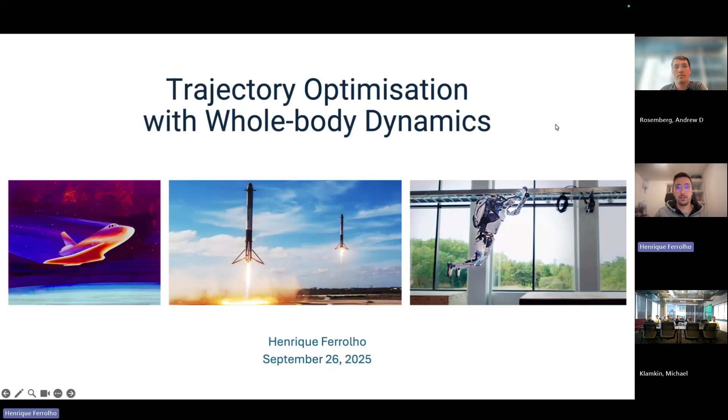But before that, I think I will give a bit of an introduction and speak a bit about me, so you guys get to know more about my background before we dive into the technical details.

I started doing robotics in about 2016. I'm originally from Portugal, but I went on an exchange program to Edinburgh, the University of Edinburgh, for my master's. I spent some time there, and then I applied and managed to get an offer to do the PhD there. So that's where I stayed from 2017 to 2021.

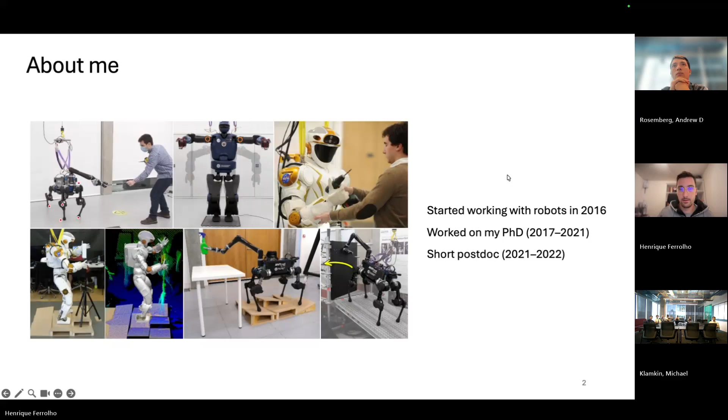After my time in academia, I switched to industry, and I worked for around 2.5 years at a company called Ocado. I'm not sure if you guys have heard about them, but they have big contracts with big supermarket chains like Sobeys or Kroger's in the US and Canada.

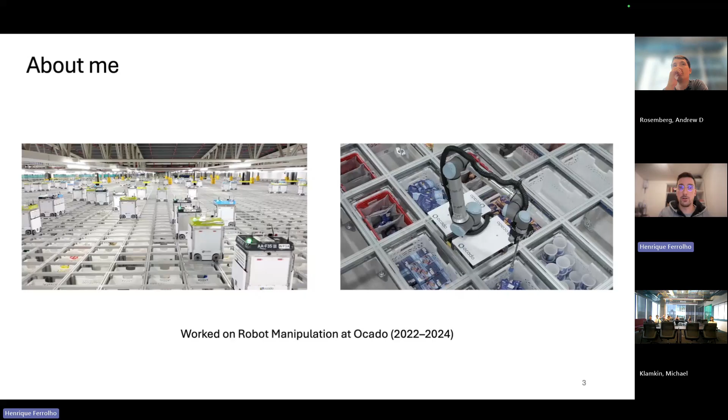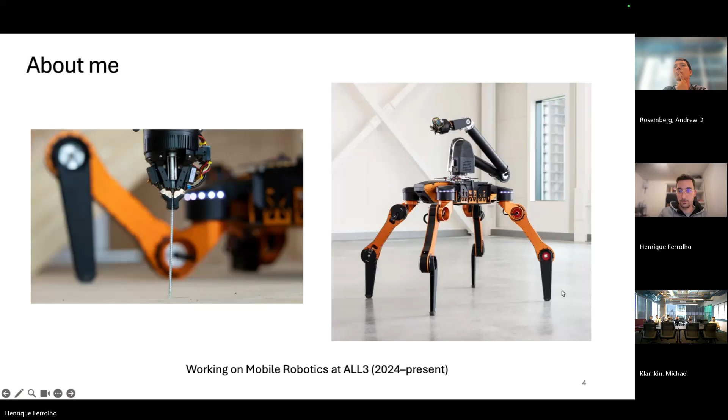That pretty much covers the work I've done in robotics on a professional level, but I really like robotics, and I have a few small projects that I spend some of my free time on.

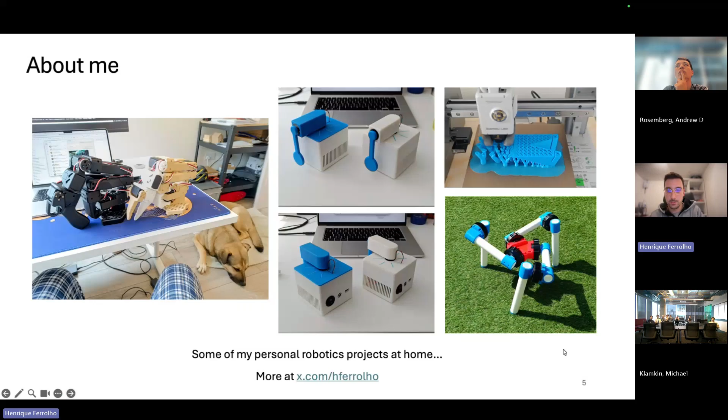Moving on to the actual presentation, so that concludes a bit the introduction about myself.

I will show you this video, from very close to the end of my PhD, and I'm quite proud of the whole sequence because there's no cuts in this video. I'll let the video play and speak a bit over it. So it's the ANYmal quadruped with the arm.

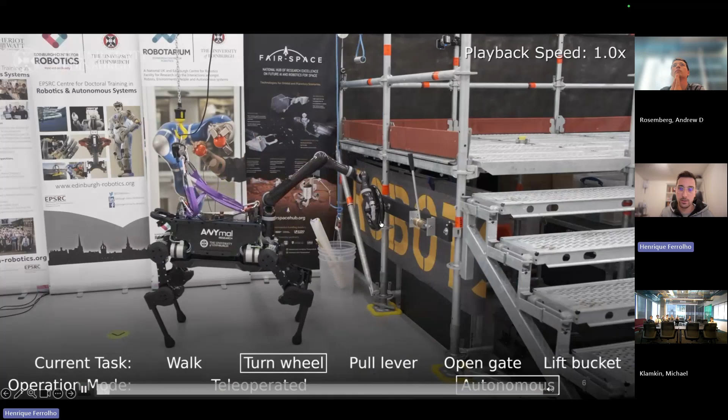We start close to an object that we are interested in manipulating. In this case, it's a valve. I'll try to get my mouse off of the video so you can see the annotations below.

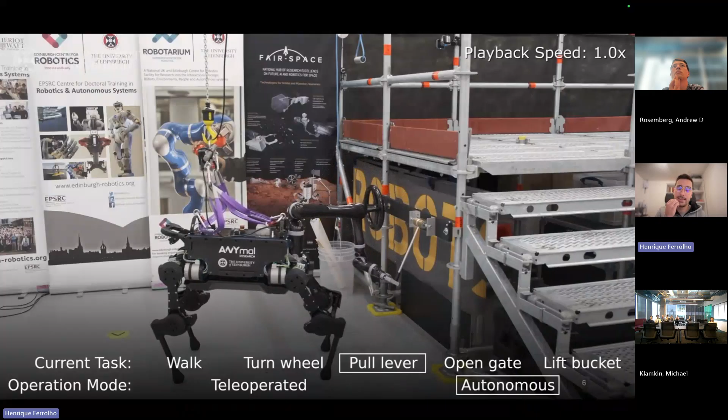You can see the operation mode is switching between teleoperated and autonomous. When I'm teleoperating, I'm only teleoperating it for walking with a joystick. I joystick it around, teleoperate it to walk close to an object of interest, then I switch it to autonomous mode.

It's not completely autonomous because it still requires someone to tell it what it should do. In this case, when I was in front of the lever, I had to literally press the button to say, okay, pull the lever.

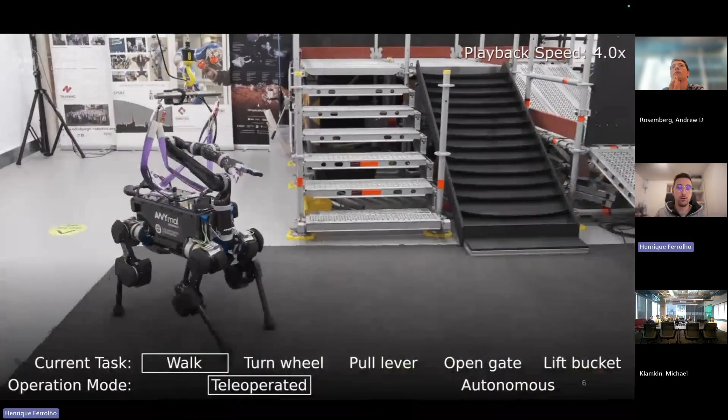You can see here when I'm walking around the lab environment and now up the ramp, it's still using the walking controller that ANYbotics provides when you buy these robots.

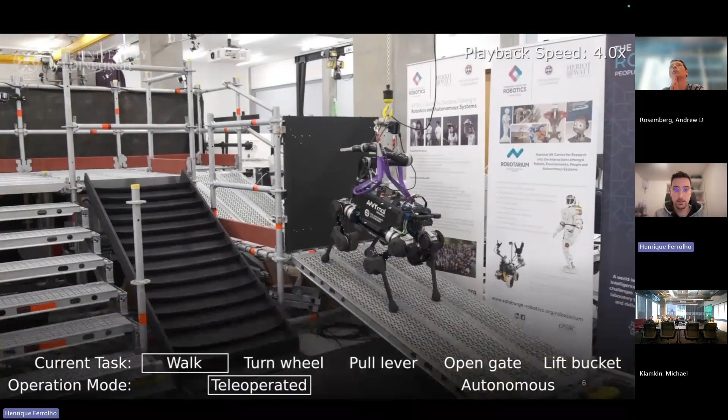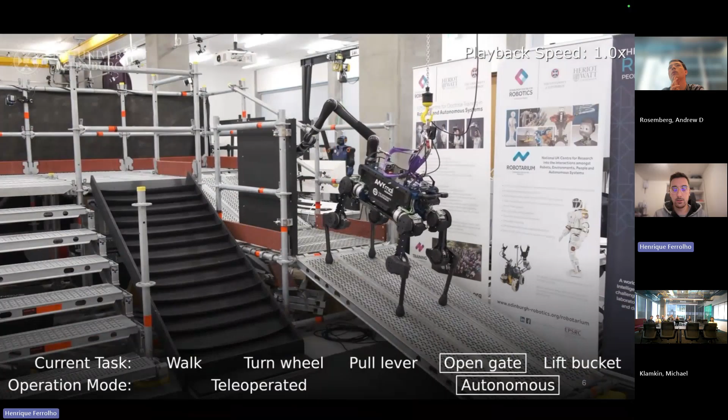But then here again, in front of the gate, there are some reflective markers for the motion capture system. So we know the state of the robot, the joint positions, the position of the gate, and we kind of know the primitives for opening a gate. So we can just click the button, open gate.

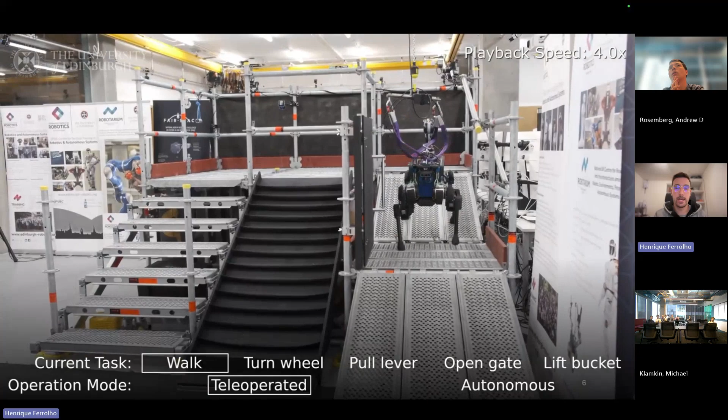What happens autonomously is the motion planning. We're solving the optimal control for optimizing the trajectory that we sent for the robot to execute, and that is considering the whole body of the robot. So the trajectory comprises not only the legs, but also the arm. Even though these are two different robots made by different companies, running two different controllers, the trajectory is planned taking into account the whole body of the robot. So we're reasoning about joint positions, velocities, joint torques, contact forces, and the timing of when we make or break contact, even though that is a predefined sequence.

And here in the last task, you can see the robot reaches out for a handle, which is connected to a rope, which is in turn connected to a bucket with unknown weight. I think it was maybe 1 or 2 kilos. The robot doesn't know about this weight. It just knows that it needs to pull the rope, and so the bucket weight acts as a disturbance, and it has to plan this complicated trajectory.

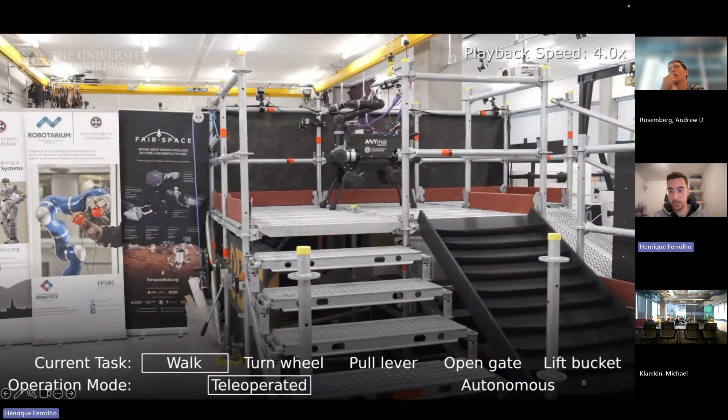I'll just go back and play it again, where it has to move the arm simultaneously and take steps. So this is simultaneous locomotion and manipulation. The reason why the walking is a bit wonky is because of the disturbance force from the weight of the bucket.

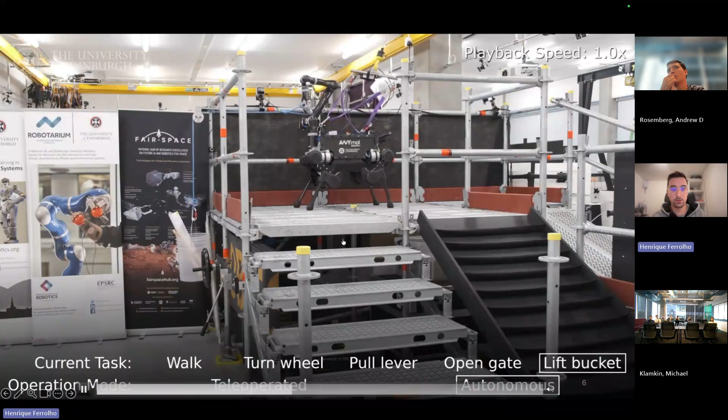And then in the next video, here. Can we ask one question? Yeah, go for it.

I think you kind of answered it, but when you do press the autonomous button and then you're doing a task, so the task isn't hard coded, but it's going to solve a trajectory optimization problem, but that's hard coded, right?

So it knows the tasks. What we hard code here is the knowledge of these kind of task primitives, like turning the wheel, pulling the lever, opening the gate. But every time it faces one of these tasks and you tell it, okay, you need to open the gate, it's able to, on the spot, plan the trajectory based on the robot's current configuration within the environment.

And that's not hard-coded. So it solves the constraints for the problem are hard-coded, right? We know that there are contact forces involved, and we know the dynamics of the robot, but those are constraints in an optimization problem that gets solved when you press that button.

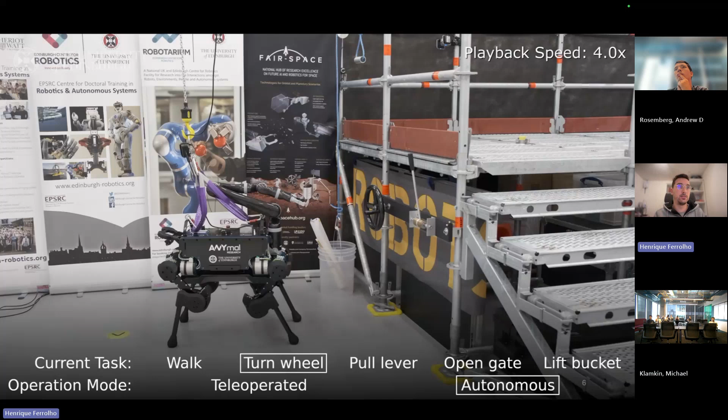Yeah. So are these what you call the primitives? These constraints, hard-coded constraints? Yeah, kind of. Those are things that I just have a function that creates an optimization problem for a lever, for a wheel, for a gate, and for pulling the bucket.

And do you use the image to figure out the position of the target states that you want to arrive at? No, that's one way of doing things, but in this kind of demonstration, I was just using the reflective markers from the motion capture system. These reflective markers - you have lots of infrared cameras around the lab, and if you attach reflective markers on the robot and on the objects that the robot needs to interact with, you can get the state of these things in the world.

Oh nice, okay, so it's a way to cheat perception. If you're not working in perception actively - and it was the case in my PhD, I was not actively doing research in perception, but I wanted to know the state of the environment, and the state of the floating base of the robot in the world, and that's why I used the motion capture system.

So here in the next video, you can see a robustness test. I'll just play through it. Let me mute it.

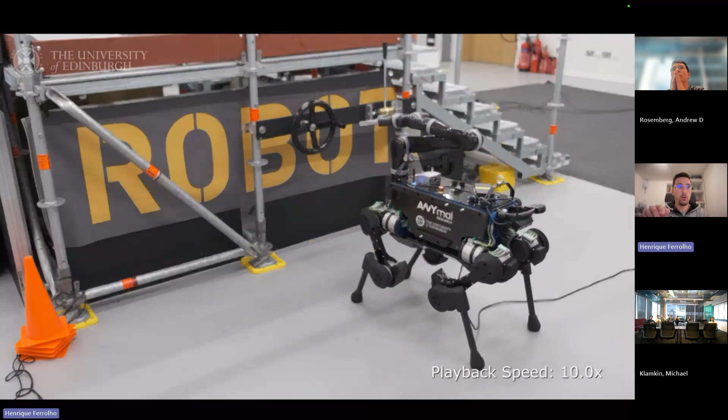So you can see that the robot is using its whole body, including the legs, to rotate the wheel. It's not just moving the quadruped and pretending that it's a fixed base robot arm only to rotate the wheel.

Are you doing that to actually understand the force the robot can apply? Yes, the reason it's moving the legs into this configuration is to maximize robustness to unexpected disturbances. Also, some tasks do require taking steps, like pulling the rope to lift the bucket, so you couldn't just assume the arm is a fixed base.

Hey Hiki, can I ask one question? When you click the button to turn the lever, do you replan throughout the trajectory, because of noise in the actuators? Do you mean as the robot is rotating the wheel? Yeah. No, this would be a very nice next step. This is a single plan for the whole thing. Yes, exactly.

And what is the fidelity of the plan? Is it discrete or continuous? It's discretized in time at a certain frequency, and it considers the full body dynamics of the robot.

So I think we can talk about this more in the discussion, it's a very nice point. But basically, when the robot is facing the wheel and I ask it to turn the wheel on the spot, it solves an optimization problem considering the full body dynamics of the robot, and then sends the optimal torques from the optimization problem, using those as feed-forward torques.

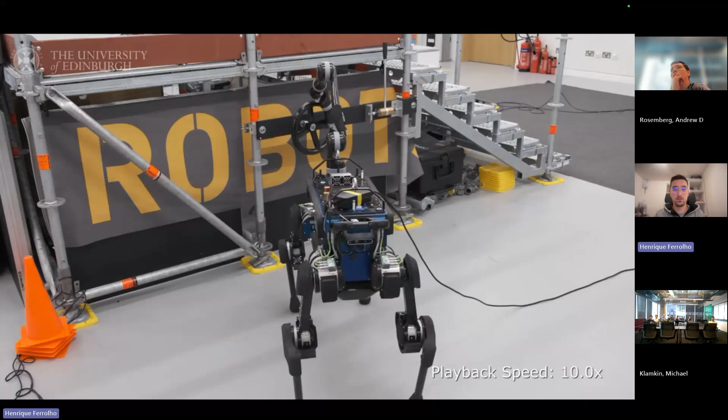Okay, so we reached the point where I'll go over the agenda briefly. First, why consider dynamics, that's the next slide. Then I'll talk about trajectory optimization, what the trajectory optimization problem is, and then direct transcription, which is one of multiple ways of solving these problems, but the one I use and like most because of its simplicity. Then I'll explain dynamics defects, an important component for direct transcription. Then we'll go through a small demo of a Julia package for optimizing trajectories for robot arms, not the quadruped, just fixed base robot arms. Then I'll have a slide with some pros and cons, and briefly mention a few packages from the Julia ecosystem, and that's it, then we wrap up.

So why would we consider dynamics in the first place? I have two examples here: one on the left is a traditional assembly line of an auto manufacturer, and on the right is the system I showed in the previous video, from the University of Edinburgh research platform, where you have the quadruped and the robot arm mounted on it. If you look on the left, these industrial arms are quite powerful.

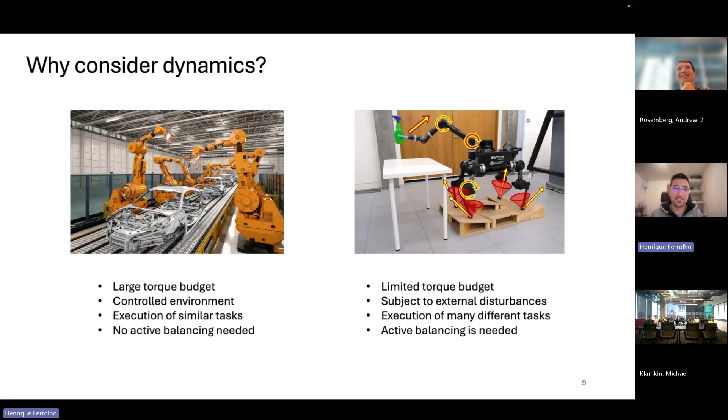But just a note that I found recently, last week, a very recent work that I have included in the final slide, which maybe just throws all of this away, and it will be a contention point for the discussion.

Okay, so now that I have somewhat convinced you that it's important to think about whole body dynamics, let's first understand, well, I guess most of you already know this, so I'll be quick. What is the trajectory optimization problem? We have state, controls, and dynamics. If we are solving the optimal, we can solve this for robots, for landing boosters from rockets. We can do it for many things, but I will use the robotics context for explaining the optimization problem.

For example, this robot arm has 6 motors, so it's a fully actuated robot with 1 motor per articulated joint. And so the position of each motor, as well as its current velocity at a specific point in time, that would be the state, right? That's X here. Q is the vector of joint positions, 6 positions for this robot arm. V would be the vector of 6 joint velocities at a specific point in time. And X would be basically the concatenation of these, which give us the state of the robot.

What are the current controls that we can command to the robot? Well, that's just the torque that we can send to the motors, right? That's how we change the state of the robot. And that's what this tau represents. The reason why I have this lambda here is that you can also change the state of the robot if you apply a force to it, right? If you go there and push the robot, that's another way to move the robot. But maybe let's ignore that for now. Let's assume that nobody's going to go there and apply a force to the robot. And so the way we move the robot is by passing current through the motors to apply torque at the joints. And that's our U, control.

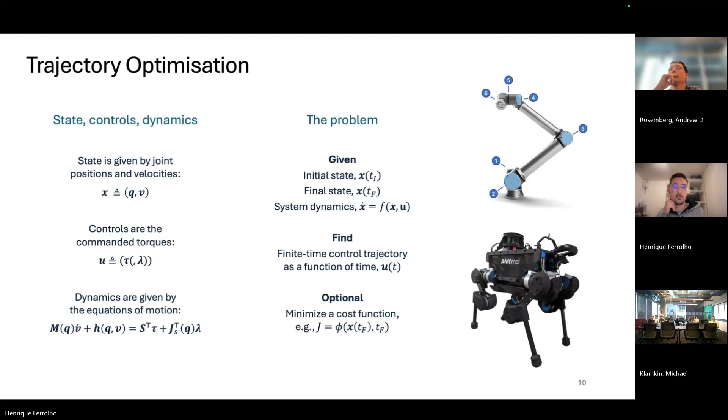You can approximate it in many different ways - with single rigid body dynamics, with centroidal dynamics, there are many different models. If you listen to talks from people at Boston Dynamics, they use what's called the potato model, where instead of reasoning on the individual inertias and masses of each link, they assume that for a given configuration, if the mechanism wasn't articulated, if it was a rigid body, you can approximate it as a potato and consider just the dynamics of this single rigid body.

So you can approximate dynamics to different degrees of fidelity, and you can also solve the optimization problem in different ways. You can use DDP, direct transcription, and other methods. I'll be talking about direct transcription again because it's the method I like most in terms of simplicity, ease of use, ease of explaining, and ease of implementing.

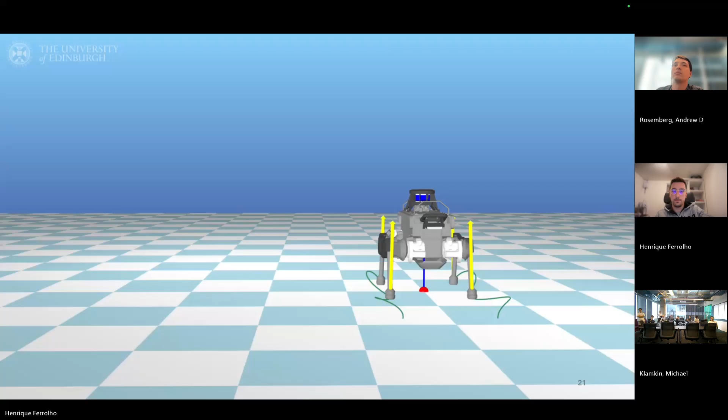This animation and the videos that follow just show the results you can get from solving this kind of problem. Here is the 3D visualization of the ANYmal quadruped, where you can see in yellow the contact forces, and the green lines are the paths of the feet in space. And then you can see the execution on the real robot.

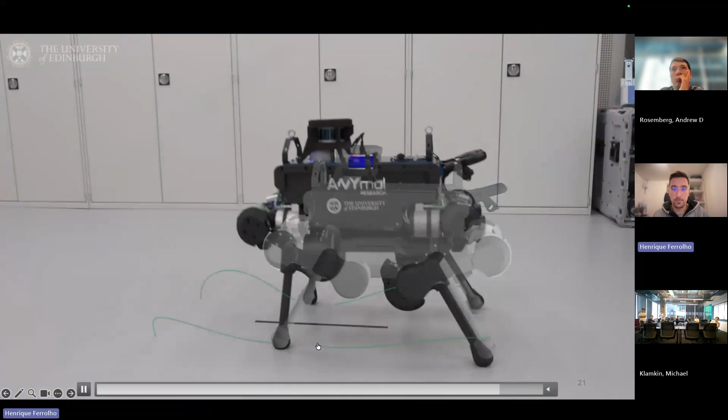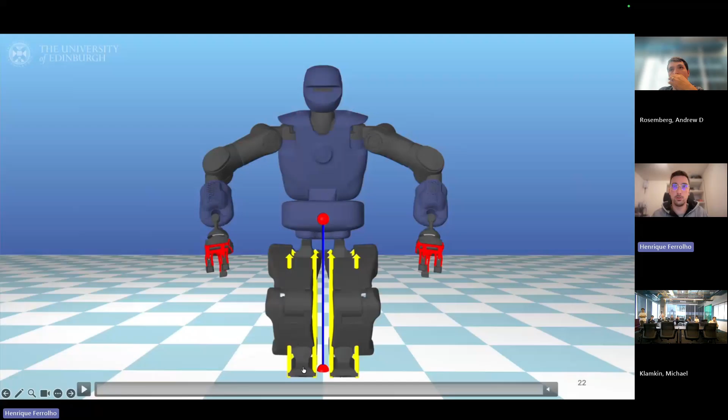And then on this video here, you can see the Talos humanoid robot. Now, because the contacts between the feet and the world cannot be simplified to a single contact point, another way to approximate it is to consider only the vertices of each foot. If we consider that each foot is like a rectangular patch, we can have 4 corners of that rectangle on each foot, and those are the 4 yellow arrows you can see here, the contact forces on those points.

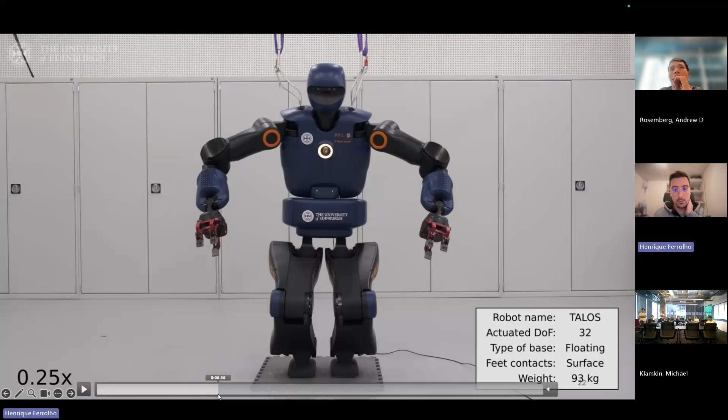And here the goal, well, the goal of the robot is to jump, but the robot doesn't know that it needs to jump. Actually, I want to describe a bit better what the constraints are in this situation. So the way I formulate this problem for this humanoid, the constraints are for the system dynamics, right? That's a given. We want to get a trajectory that is compatible with the physical behavior of the system.

And then the constraints I had were the position for the feet. If we split time into 3 portions, the feet are constrained in the beginning and constrained at the end, but not in between, so the position of the feet is able to move in the middle. And then I also have constraints about the contact forces the feet can experience in these 3 segments. At the beginning and at the end, the feet are capable of experiencing forces, but in the middle, they must not experience any external force.

And as you can imagine, this is very different from telling the robot to jump. Actually, the initial guess to this problem was the robot standing in a very different configuration, where the arms were straight pointing down. But the result you obtain, the emerging behavior from this kind of trajectory optimization formulation that reasons about the whole body dynamics of the robot, you can see it has chosen to start with the arms in this kind of position, and then actually use the arms to build up momentum to lift the feet off the ground.

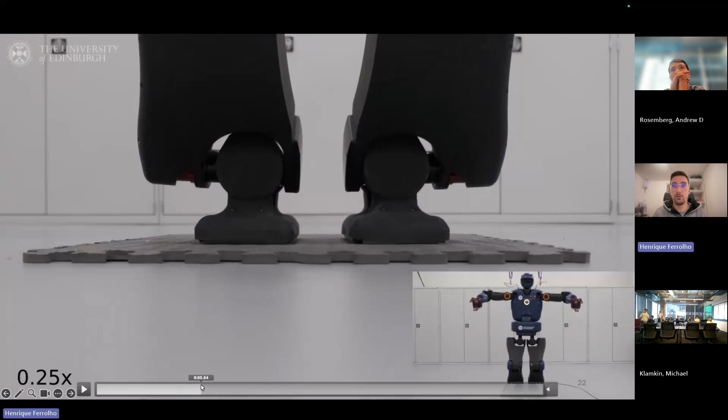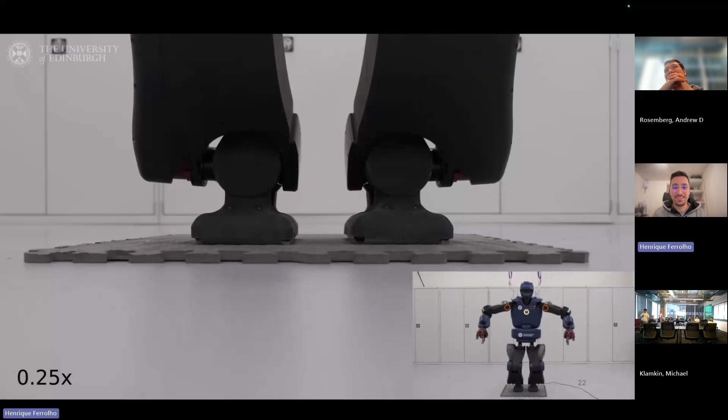Some people usually laugh at how small this jump is, and I actually had to lower the camera to the floor to show that the feet were coming off the ground. But this robot is very different from Atlas from Boston Dynamics, or even the new Unitrees, even though this is electric also. The bandwidth of the torque control of these motors is quite limited, and it's a heavy robot, so this is actually quite an impressive feat for this specific hardware. The emerging behavior of the arms swinging up is really interesting to see emerging from the optimization.

Just one question: what if it was too heavy, what if it was an infeasible optimization problem? Yeah, it will - the numerical optimizer will not converge and will output an error code.

It will say, okay, I get what you're asking me to do. I get that you're trying for my feet to stay still at the beginning and at the end, and they can move in the middle, and I cannot experience contact forces. But the numerical solver will try as hard as it can, and it will say, actually, there is no way that I can satisfy your dynamics constraints, because given the weight of the robot, there's no way that I can produce enough torque to lift the feet off the ground to produce zero forces.

As a follow-up to that, what if the robot does have enough torque, but like in your example before about lifting the bucket, what if it had a really heavy backpack on that it didn't know about? And so the solver converged and says you can jump, but then it tries to jump and it can't.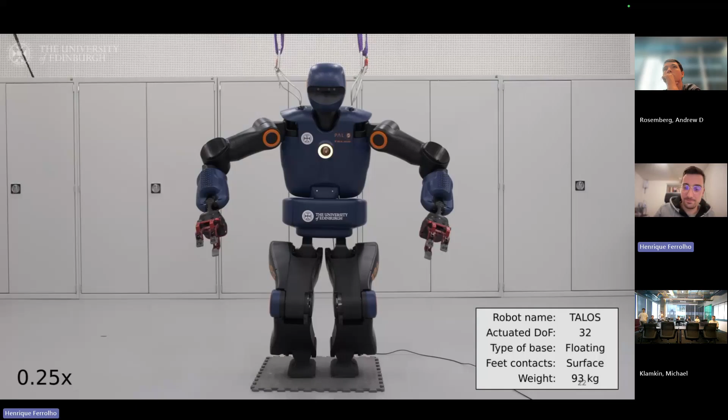Okay, let me just have a look at the time. Okay.

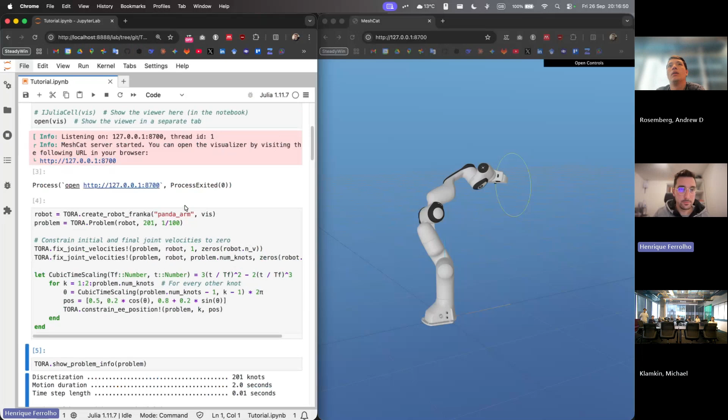Okay, let me see if I can. All right, so we create a robot. This is basically just spawning the kinematics and the model.

Then we create a problem. This is a high-level description of the optimization problem. I'm just saying I want to use 201 points, so this is the time discretization. Then this is the duration between each pair of consecutive points, so 1/100 means we are going to discretize this trajectory at 100 hertz. We can print the problem information here, and so with 201 knots at 100 hertz, we are representing 2 seconds of trajectory.

I want to modify the problem. This is what this function is doing. In Julia, the exclamation mark means we are modifying, mutating the first parameter that we pass it. So I'm trying to fix the joint velocities for this optimization problem, fixing the joint velocities at the first point of the trajectory, and this number of knots is the last point of the trajectory, the total number of knots. The final argument is the specific numerical values I want to constrain it to. So intuitively, in plain English, we're constraining the initial and final joint velocities of the robot to 0. The robot starts at a standstill and finishes at a standstill.

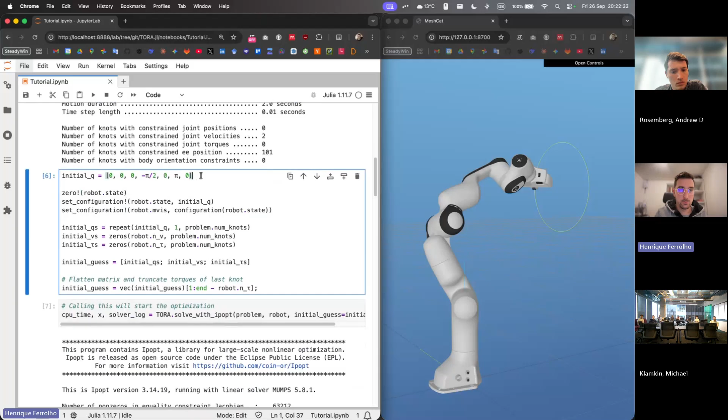In the next cell, this initial q, if I execute it, I'm rendering the robot with that initial queue, which is 0 position on the first joint, second joint, and third joint, then minus 90 degrees on the fourth joint, which is the elbow, and rotating this joint here so the end effector points like that. This is our initial guess for this task, but you can see the end effector is not even coinciding with the circular path we want to draw. That's what I meant when I said the initial guess does not need to be super good. It could be rubbish actually, and solvers can still find a way to reach a feasible solution.

But of course, the closer you are, or the better your initial guess is, the numerical values you use for the decision variables are closer to something that makes sense. So the solver will have to do less work. It will converge faster. Happy days.

So is that just what you think Ipopt uses as the start, like the 0th iteration? Yeah, the initial value doesn't appear in the model itself, right? Besides, these lines are just setting the configuration of this mechanism, but are not changing the problem.

Here, initial qs, I'm going to repeat the initial configuration over time. So even though we want the robot to draw a circle, our initial guess is the robot standing still in this configuration. The initial joint velocity guesses are zeros, and the initial torques are also zero.

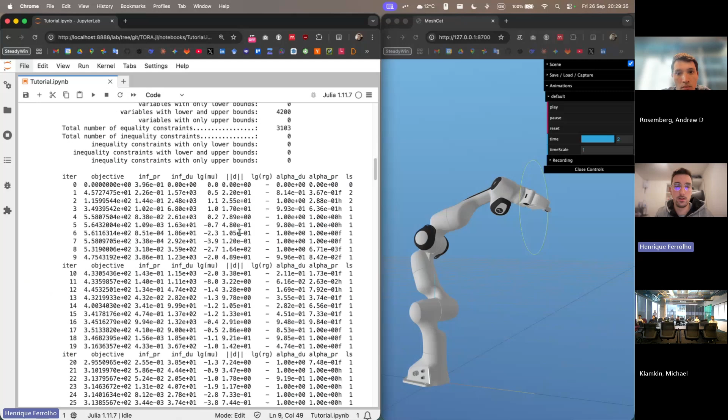Now you will see values on the objective value. And you can see that the first value is 0. Why is that? Because the initial torques that we formulated as the initial guess are all zeros, so it's adding them all up. And then they start increasing.

Why? Because it figures out from the dynamics constraints that in order to make the robot move, it needs to use torques. But we are trying to minimize torques as a cost function, so there's conflicting interests at play here. You want to use torques to move the robot, but the cost function says try to use as little torque as possible. So this one takes a lot longer to solve, as you can see, and again you can tune the options to not have this happen, because you don't want the solver to take this many iterations.

Say, if we look at the behavior, here we start with 0, then we go to the power of 1, power of 2, and in the power of 2 we start with 5 and decrease from 4 to 3. And then look, from iteration 21 beyond, we're always around 3.11, 3.11, basically getting diminishing returns. So the solver is trying to minimize this cost function as best it can, but there's very little gain in doing so for so many iterations. You could cut it short here, where you already have a feasibility error of power -2, power -3, and you've reached a pretty good plateau on the cost function.

Yeah, if I play this now... did it find a solution? Yeah, it says solved to acceptable level.

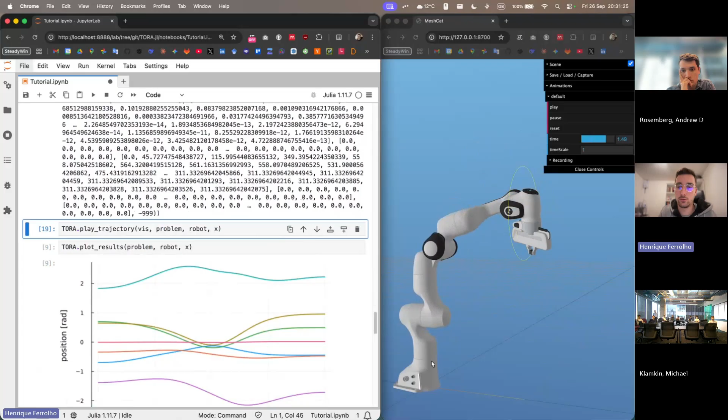If I play the solution now, it will look different. You'll see that the robot is now a lot more straight, probably to cancel out the gravity effect on the joints closer to the base, so it's trying to save some torque there. Then where it folds is closer to the wrist, because beyond the wrist the linkages of the robot are lighter, so it doesn't require as much torque to move it around. That's why you get this kind of behavior.

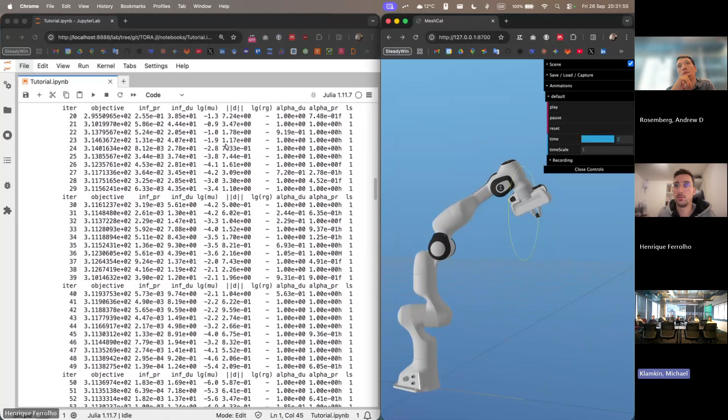Does this have defect control? That's why I initially asked. I thought that was going to be in the objective, minimizing the defects. Those are hard constraints. Oh, okay. Yeah, so the defects, as he was talking about, come implicitly as equality constraints, which we can draw on the board later on.

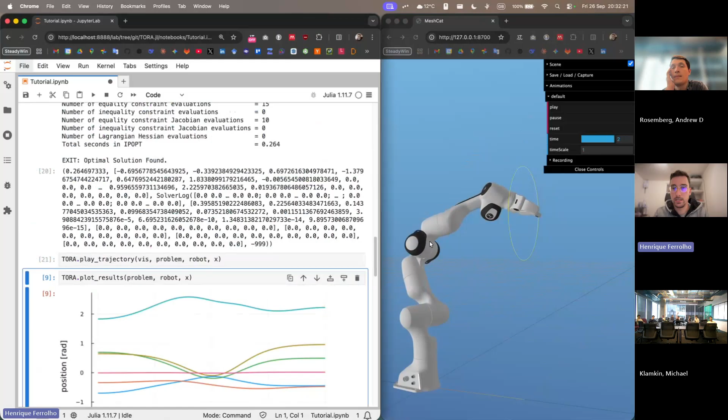And I will just play this one again. Notice how the robot moves with the minimization of the torques. Now if I set that to false and play it again, you'll see that the elbow is folding more. It's costing more torque, but we don't have that as a cost function.

Anyway, moving on, you can see here in this plot the evolution of the joint positions, the evolution of the joint velocities over time, and then the optimal torques that we should send to each of the motors to execute this trajectory.

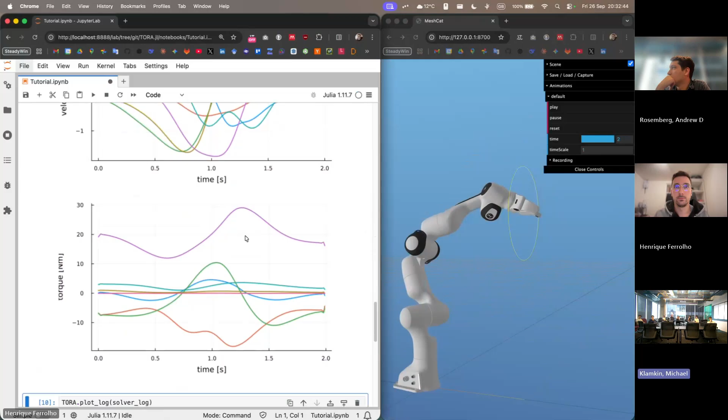I just have one question. So this has 4,000 variables for how many degrees of freedom? So there are 6 joints in this robot, so for each state you would need 6 joint positions plus 6 joint velocities plus the vector of 6 joint torques that you want to send for each point in time.

And because we're using 201 knots, that should add up, right? So 201 times 18, right? It does not add up. Why is that?

Wait, initial configuration - so this is 6. Oh sorry, this is 7. This is not a 6 degree of freedom robot, the Franka is 7. So you've got 7 positions, 7 velocities, 7 torques. That's 21 times 201, which is 4,221. It's less because we're removing the torques from the last point - at the last point we don't need the torques. This should add up with the total number of variables here. Well, it does not, I don't know why.

Can you speak to the scaling of this? Once you go to the more complicated Tesla humanoid one, how many DOFs are you optimizing over?

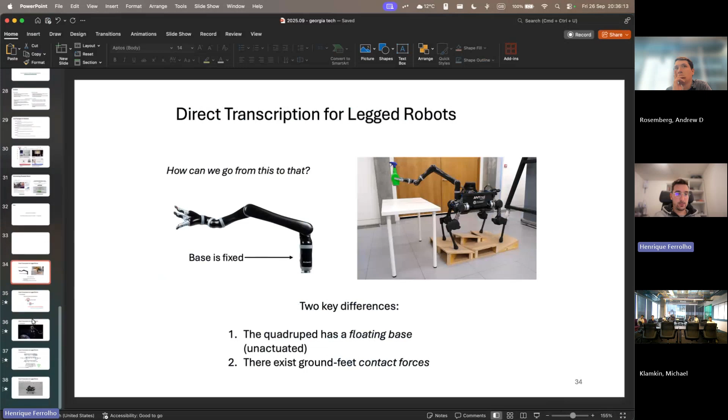Oh, I cannot play it, that's unfortunate. But basically, you can optimize a trajectory that reasons about a floating base system - the base of the robot does not have direct control, because you don't have jetpacks on it, and you don't have contact with the feet initially. Then to add contact with the feet, you add extra decision variables for the contact forces, and you also need additional constraints - if we use a Coulomb friction model, the contact forces should lie within a friction cone or friction pyramid.

So to go from an arm to a floating base like a quadruped or a humanoid, you do need additional details on the formulation.